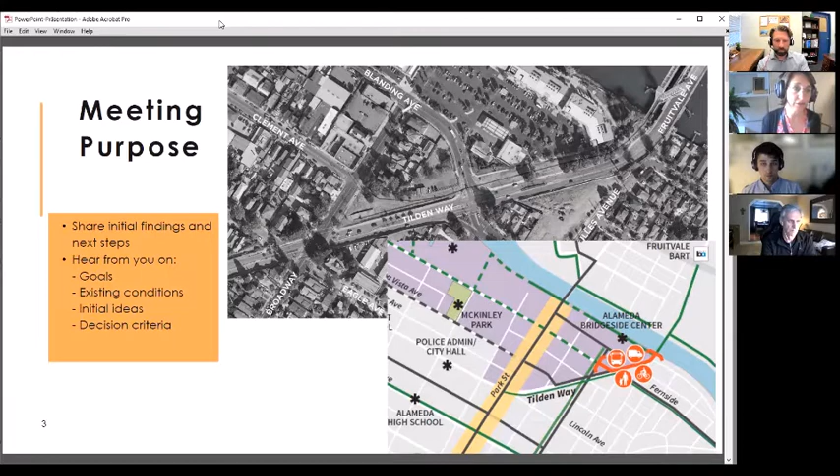What's been in our general plan all along is to connect Clement Avenue and Tilden Way somehow. It is a truck route, and also it's an opportunity for green space, open space, and improved community in this area, which is now really just bisected by this major street, and somehow to calm traffic. We've heard from you all a lot about speeding and the difficulties crossing as people walking across the street and bicycling.

And so that's where we're at. We're at the beginning, so you haven't missed much. We talked about the project team here. Project stakeholders - we've had one kickoff meeting with the project stakeholders, as well as a meeting right before this one, like a week before, to show them the same presentation. We're working closely with the key stakeholders in this area.

This map, the star is the main part of the project. It shows we're in the eastern end, right by Oakland, and the upper right is where BART is. So a lot of activity going between BART and Alameda, especially for people bicycling and taking the bus.

We've already started reaching out to community members, sent out letters to adjacent properties, done outreach with social media, emails, and sandwich boards that sometimes are upright, but sometimes have fallen - so my apologies on that one. We do have a project webpage and an online survey that's going on right now and still continuing. So please fill it out and ask any interested parties that you know of to fill it out.

Here in the lower right is the project area, showing its proximity. This map is from 1924, going back in time, showing how this is an older neighborhood.

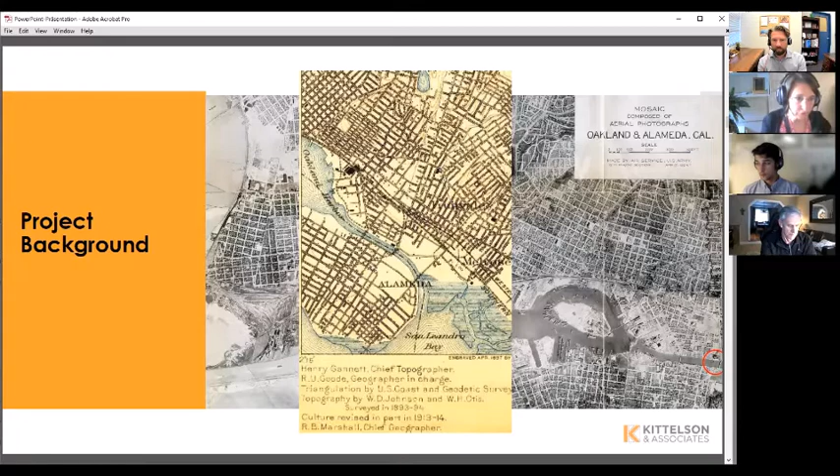Alameda was built, a lot of it, before automobiles. This map shows it used to be a railroad, as we talked about. So it has a long history and a solid community around it, and we're just trying to make it better.

We do have money. We have a $10 million grant from Measure BB, from the Alameda County Transportation Commission, and we used part of it to purchase the Union Pacific property. We do know we have environmental cleanup to do, so when it comes down to how much we have for construction, it doesn't look as exciting, but we do have money for it.

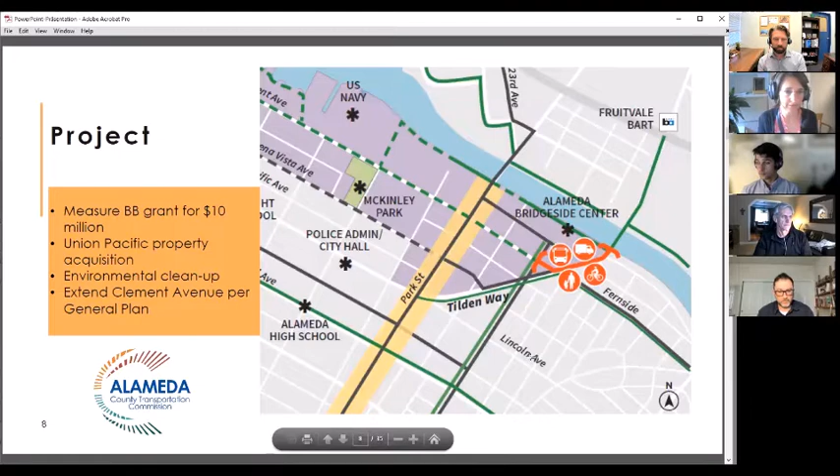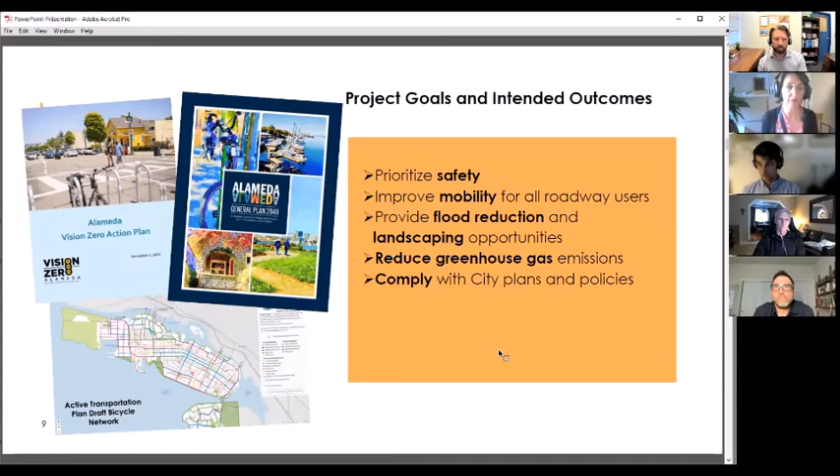So that's the idea: multimodal projects, safety, and mobility improvements. We've heard from you with the initial survey, looked at the preliminary data and open-ended comments, with people wanting open space and aesthetic improvements, landscaping as well. We have sea level rise in our future, so flood reduction opportunities are wanted, along with reducing greenhouse gas emissions and idling, and making it more attractive so people feel comfortable walking and bicycling, and of course complying with city plans and policies.

This shows what else is going on around this area. The big red is the project we're talking about, where we've purchased a property, and what more can we do with this area in terms of transportation and open space, green, rain gardens, bioretention areas. On the Oakland side, they're improving Fruitvale Avenue, especially for bicycling, and it's going to be nicer to walk there as well.

Then you get to the bridge, and the county is going to restripe to put bike lanes there. Then you have the Cross Alameda Trail, over 3 miles all the way to Alameda Point, and we're getting that completed. Clement Avenue is the project that will start construction this year and probably end next year, which will take us to this project at Broadway. Our project is this red section between Broadway and the bridge.

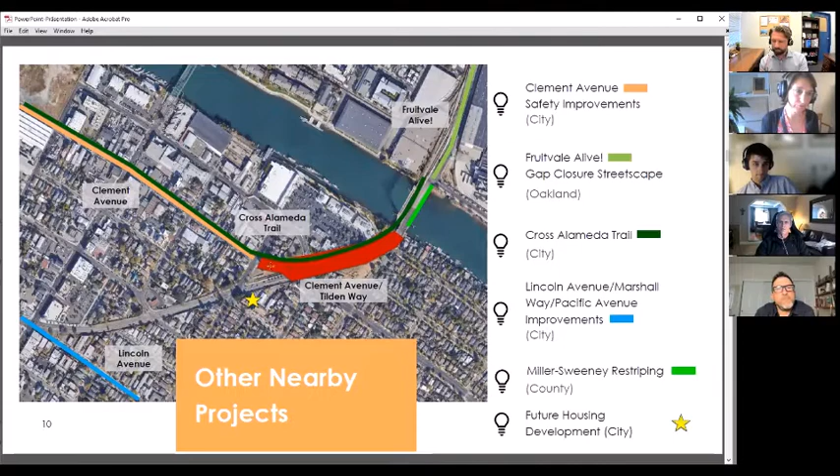We're at the first part of community engagement, and we'll have more in August and September, asking for approvals from the Transportation Commission and City Council in the fall, working on design in 2023, and starting construction in 2024.

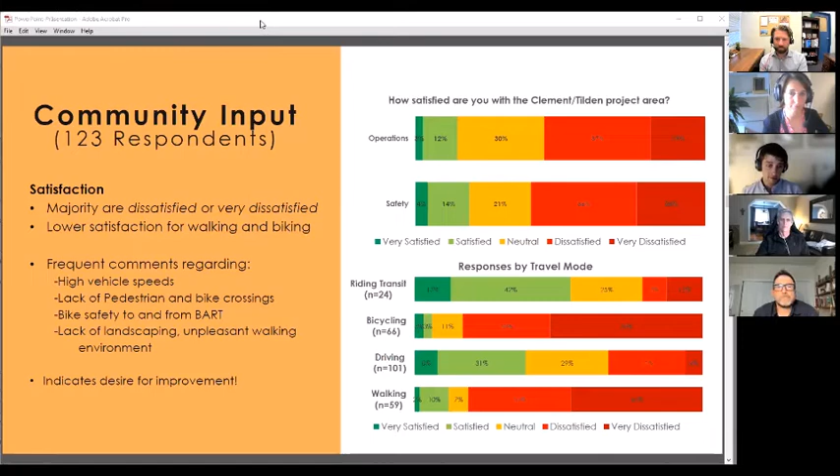Going back to those goals that Gail talked about, wanting to prioritize safety for everybody, whether they're inside a car or outside of it, and improving mobility for everybody as well. So we really see, based on the community input we have so far, a lot of opportunity and desire for improving conditions.

I want to go through a few basic pieces about what the transportation network is here. Tying it back to the project goals, as Gail mentioned, one piece is extending Clement. Looking at existing city plans, there are two basic things involved. One is you can see that dashed blue line right there where the extension would be, which is part of the truck route network, so it's a proposed truck route.

The other thing is it's a key extension for the Cross Alameda Trail. Right off the bat, we can see what that extension could serve, but there's also a lot of other needs in the area. There's the bridge connection for driving, biking, or walking to Oakland. There's the Nob Hill Shopping Center, which has bus stops right there. There are a number of transit lines running through the area, and of course connections to the south along Tilden and Broadway. So this map is showing a lot, and that's really because the area is doing a lot.

There are also some existing bike lanes, and then some other proposed bike lanes in the area, indicated by green. I mentioned some comments we got on the survey. We also worked with city staff to cull comments that were received in developing the active transportation plan. Very similar comments about speeds in the area, and very similar comments about wanting pedestrian improvements.

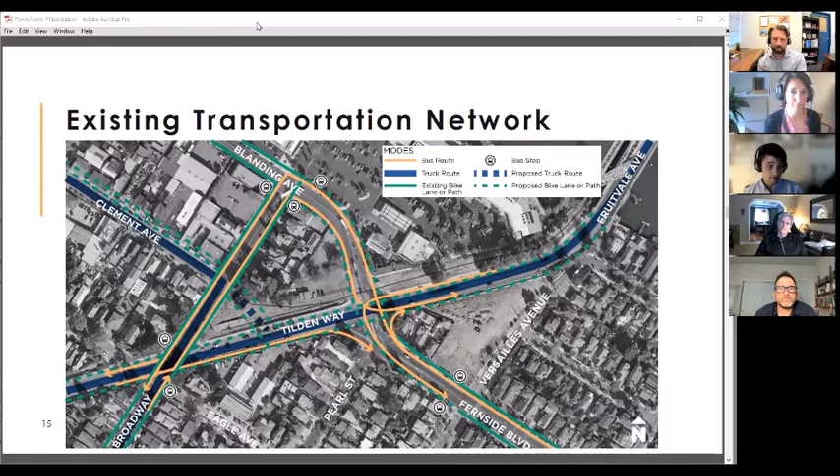So comments really indicate a desire for traffic calming or slower speeds at that Clement and Broadway intersection. Also, there's no pedestrian crossing on the southwest leg at Tilden and Blanding, so people have to go around and take the long way if they want to cross there.

And down at the bottom, where Pearl Street ties into Fernside, there's a vehicle movement that goes south to north where the driver has to judge a bunch of gaps to get onto Fruitvale to head to Oakland. We got a lot of comments from the ATP and the survey about that being a movement with a lot of conflicts, whether you're walking or driving there.

We did do data collection here, so we collected traffic movement counts for people driving, walking, and biking, along with speed counts. We got average and 85th percentile speed right near the bridge. The average speed is 28 miles per hour, and the 85th percentile speed was 34. That means out of every 100 people, 85 are driving that speed or lower, 15 are driving higher.

A lot of comments about pedestrians having to cross right turn slip lanes or having indirect paths. So I've shared a lot of information with you, but this slide contains a lot of the pieces that people have identified and we've observed from our field observations about conditions and opportunities for improvement.

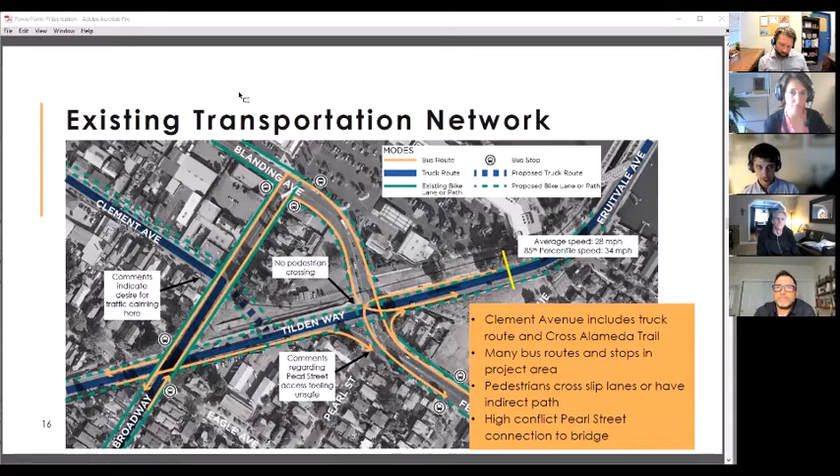The next slide shows the AC Transit bus service through the area. As I mentioned before, there is quite a bit of service, including a number of key routes that serve a lot of riders. There are routes that come from the bridge, take that right turn onto Blanding, serve the shopping center, and then head south, whether along Tilden or Broadway.

We've already engaged AC Transit and heard from them about what their ridership priorities are, and what their bus stop location and amenities priorities are, to make sure that anything we do here preserves or improves bus service, both from getting buses through the intersections and also making sure that the bus stops are pleasant and people can actually get to them.

In those conversations with AC Transit, we've heard that they really want to still serve that Nob Hill Shopping Center up there on Blanding and Broadway. That's a really key destination for them, but they obviously don't want any changes to degrade their service or slow buses down. There's really no desire to consolidate or remove any bus stops. The stops they have serve important purposes, but we did collaboratively identify that some of these bus stops could be made more pleasant, whether through shelters or improved waiting areas. So that's another opportunity for this project as well.

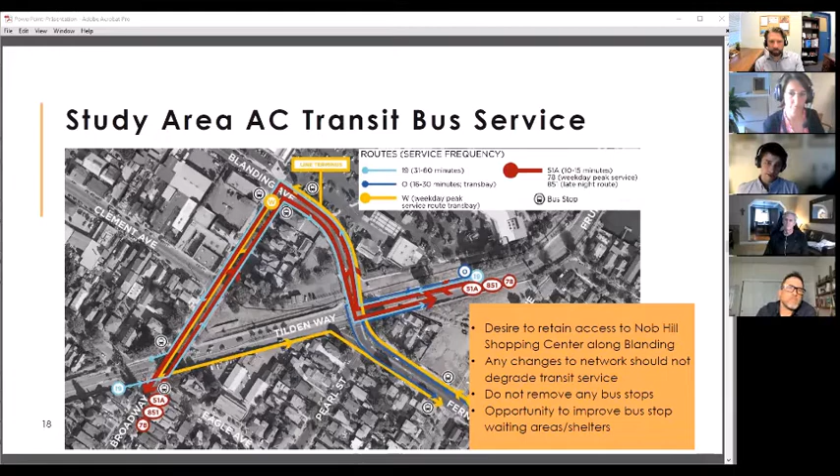Good, next slide. In looking at safety, I've already talked a little bit about what people have shared, what our field observations have shown, what speeds are, and where some key conflict areas are. So one more way we can look at safety is to understand what has happened in terms of reported crashes. This is showing reported injury collisions in the project study area from 2011 to 2020.

Recognizing that reported collisions aren't necessarily the full history of what's happened, but it's what has made its way into reports. Before we talk about any patterns at the intersection, I'll note the red lines along Clement and Blanding indicate those roadways are on the high injury corridor network from the city's Vision Zero action plan. And the Blanding Tilden intersection is a high crash intersection, so this is definitely a focus area coming out of the safety work the city has already done.

Right off the bat, the first thing you probably notice is there's a concentration of crashes at each intersection. Those little bike icons indicate crashes that have included someone biking. A particular note, we actually did add in a crash from 2021 - it's the pink crash right at Tilden and Broadway, near the bottom of the screen, which was unfortunately a fatal crash in February 2021. So that's the one crash on this slide that has resulted in death; the others are injury or serious injury collisions.

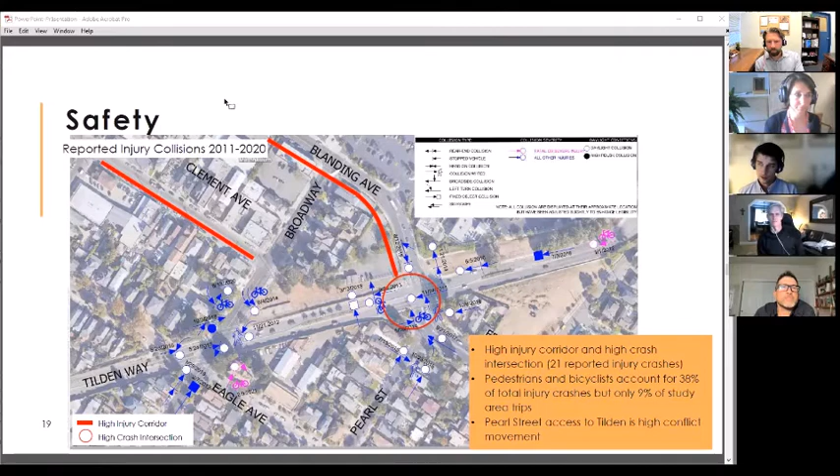The next piece of existing conditions I want to talk about is just a pure vehicle capacity standpoint - understanding if people are able to get through these intersections in a timely fashion. To assess that, we took traffic counts in March 2022 and compared those to what the city had from 2019 and other years that preceded COVID-19, because we know travel patterns have changed and will continue to change. We adjusted the 2022 volumes up slightly to be more representative of pre-COVID levels. Of course we don't know what the future holds, but we want to account for that. We typically look at the morning rush hour and the evening rush hour, the peak periods.

What these circles are showing is that at each one of these intersections, the existing conditions, adjusted a little bit for pre-COVID conditions, are below capacity. So there might be a little bit of queuing in those peak hours, but in general these intersections are operating below capacity. They're not failing in traffic engineering terms.

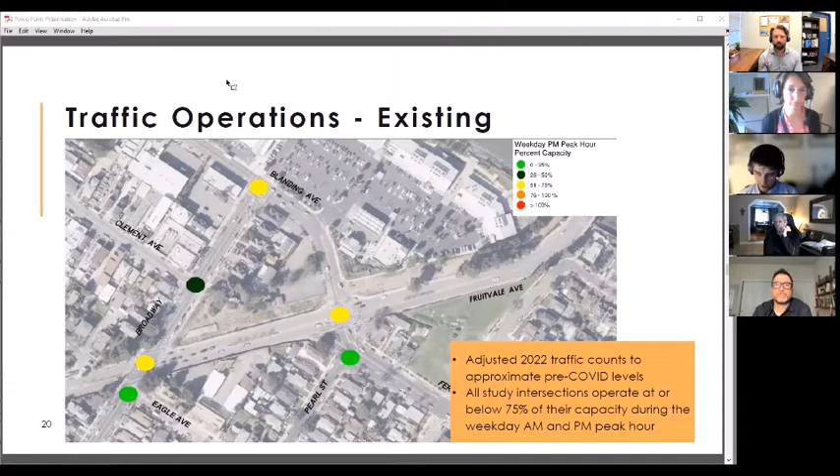We also want to not just plan for today, but plan for the future as well. So we've pulled projected traffic growth from the Alameda countywide model to understand projected patterns in 2040. We don't need to be beholden to a traffic model, but we do want to understand what we see coming based on projected land use and transportation changes. You can see some of those greens turn to yellow or orange, indicating from our legend that they get a little bit closer to capacity. But with existing intersection control and geometries, in 2040 things are still at or below capacity. So that's from a pure vehicle capacity and operation standpoint.

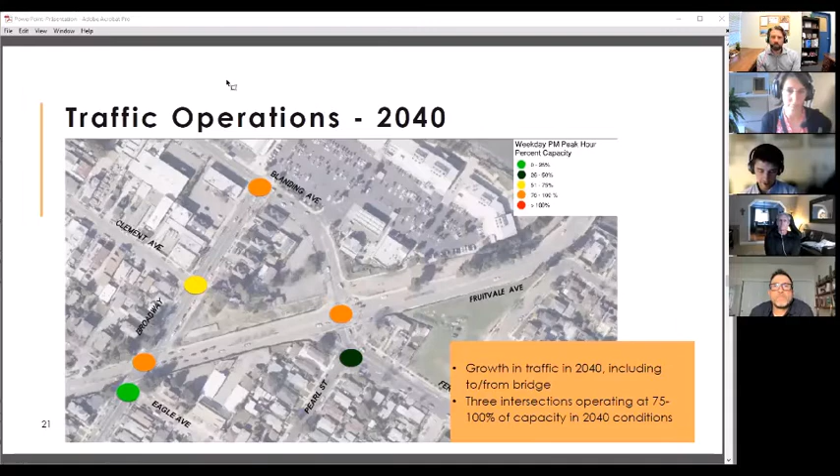Okay, so those are the existing conditions. And now we get to the fun part of talking about concept development. We've engaged some key project stakeholders, as Gail mentioned, and started to use our existing conditions to inform what our goals for this project would be, and drafted up some initial ideas, which are good for understanding constraints and getting feedback. Again, key emphasis here: decisions have not been made. These are initial ideas and concepts.

The next slide will show how a few concepts that we've come up with align to the project goals.

So again, wanting to improve safety. We talked about speed. We talked about providing more connections for people walking and biking. We talked about trying to reduce some of those key conflict areas. Wanting to provide mobility and connections for all modes. Wanting to provide that truck access for the general plan.

As important as anything is making sure we're not overbuilding. We want to consider future projected travel demand, but we don't want to overbuild or put more pavement down. That runs in direct contradiction with the city's goals to reduce greenhouse gas emissions and provide flood reduction and landscaping opportunities.

So we've looked at a couple options at Fernside and Tilden—a roundabout and a signal. I want to say a little bit about a roundabout and how that would help with project goals. The next couple slides will show us a few things about roundabouts.

Roundabouts might be a little bit unfamiliar to some of you. Some of you might have seen these slides at other city presentations, but they're still an emerging intersection form in some areas. Over the past few decades in the United States, they have a remarkable track record for safety performance. Before and after studies, time and again, have shown not just a reduction in crashes, but a sharp reduction in injury and fatality crashes.

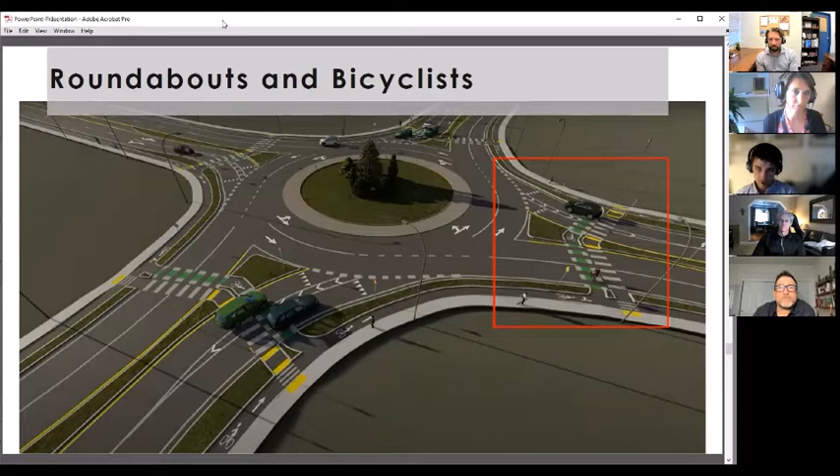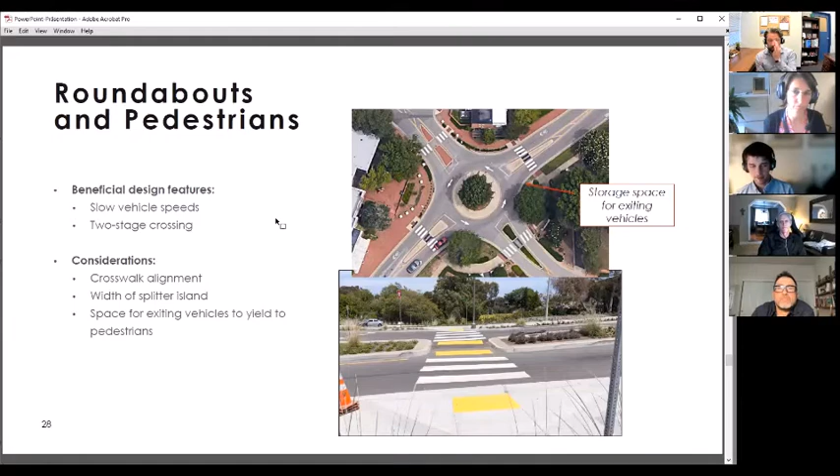The first piece you'll notice is that at the Fruitvale-Tilden Blanding-Fernside intersection, there's a single lane roundabout. That would be for folks coming off the bridge. The lanes would drop to a single lane, and then there would be a single lane roundabout to get through, whether you take a right to Knott Hill, continue along Tilden, or a left to Fernside. Moving from right to left, the light green indicates a multi-use path or bike and walking space, so there would be opportunities for bicyclists to be separated and stay out of the intersection.

Moving a little further, where Fernside and Pearl are, you see the annotation that says right in, right out. That's essentially eliminating that Pearl Street conflict we were talking about, where people dart across Fernside to get to the bridge. So that's putting a median there, so that conflict goes away, and those drivers would find a different way to get to the bridge.

How do folks come off the bridge and get to the potential future Cross Alameda Trail? They'd take a separated bike lane, and you can see where that bike path could be two-way. Then they could take that right and connect onto Clement. I'm showing that as possibly being two-way as well.

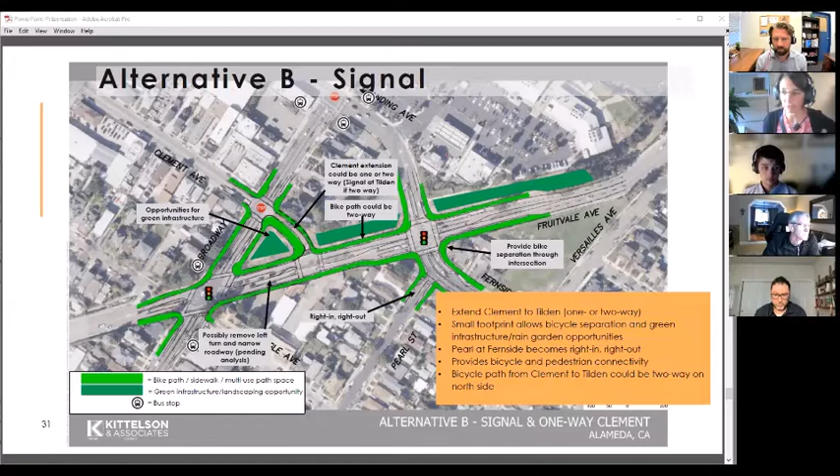And then at 2 minutes, the audio will be muted. Usually we show the timer on the screen, but I don't know how to show both the timer and this concept draft idea. I think it might be valuable to show, instead of the timer, something like an alternative A1, or whatever the speaker wants us to show.

Is that okay, city staff team? Consultant team, you think that works okay? Okay, I get the thumbs up and a nod. Super. So we have 6 hands up, so please don't be shy. And 7, keep it up. All right, 8. All right.

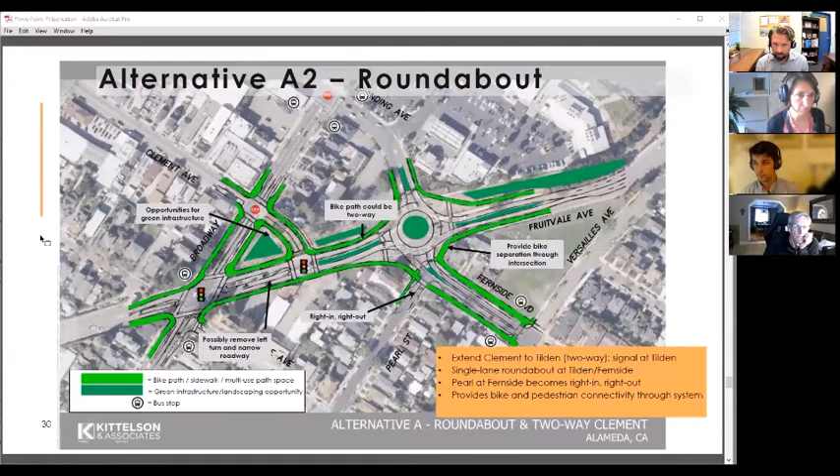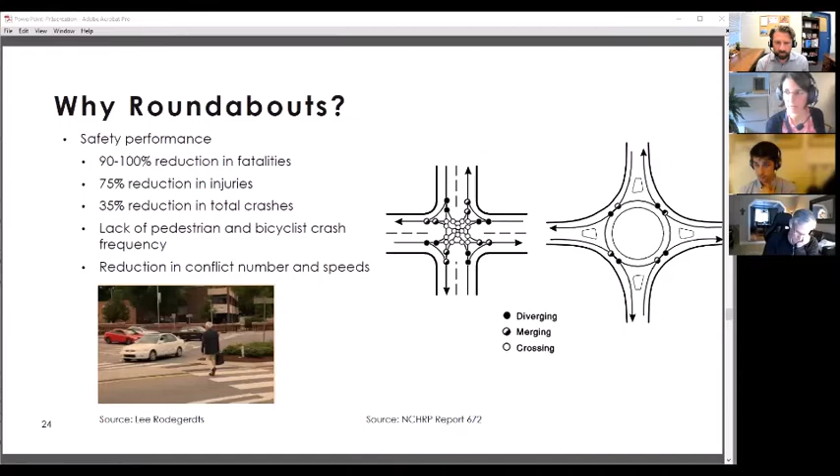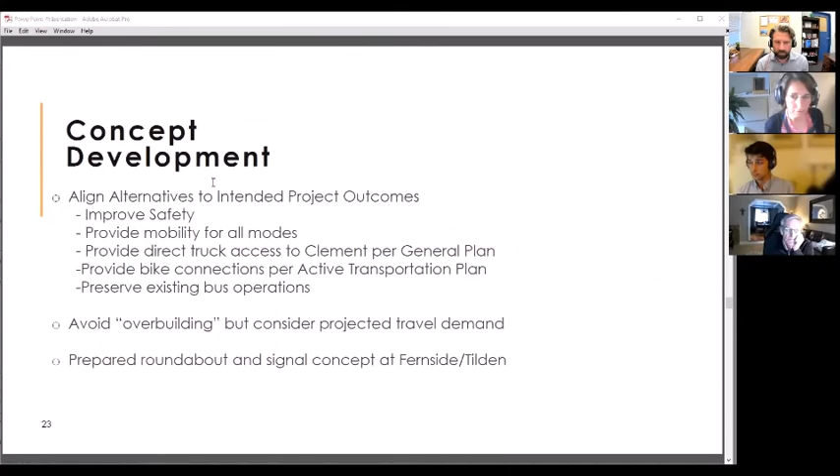I'd like to see the two roundabout alternatives that you were giving. A little bit further than that. There were two initial roundabout concepts that you were showing near the beginning, where you showed two potential roundabout configurations when describing them. It's like two examples where you were just sort of going over what a roundabout is. One of them had full separation and one of them didn't.

Yeah, I guess it's that one. Yes, so if you look at this top picture here, the thing I'd be concerned with if we went with a design like this first one is there's zero indication for a cyclist riding here. What happens? It's like the bike lane just ends and they essentially ride into a curb if they keep going straight. So if we move forward with something like that, I would hope we'd put in something that gives the cyclist some indication of what they should do - either dashed green, or showing it's a merge area or something - because where bike lanes just end is where it becomes most dangerous, and it's really unfortunate and very discouraging to cycling.

So I'd hope we'd go with a roundabout design with full separation like you showed in the other one. I guess my main concern with the full separation one, though, is that it does significantly increase the crossing distance for pedestrians. If you just want to go straight across an intersection with a roundabout in it, even with those pedestrian refuge areas, it makes the whole walk a lot longer. So it's something to consider, if we can figure out how to minimize that or make it more pleasant.

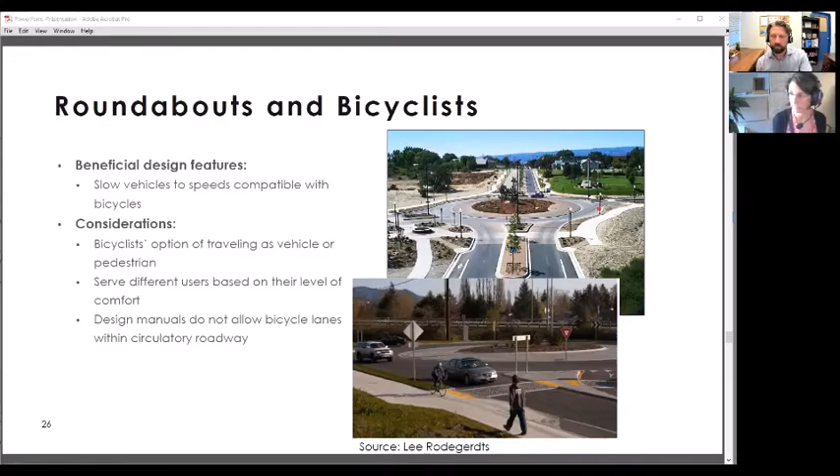So one of the biggest priorities I think to see here, and that I'd like to see on this alternative A1, is, you know, I think it's very promising. But the biggest priority in my mind is how do we get a protected bikeway all the way to Fruitvale BART that everyone will feel safe on and that keeps bikes away from traffic as much as possible. The west end has plans for the bicycle bridge, but the east end needs something too. I think maybe this could be that area.

So with that in mind, I guess one thing is how does this connect to a protected bike facility on the bridge, and what does that look like? Obviously that seems to be out of scope for this project, but I would like us to at least be a little forward thinking here, making sure that there's a safe connection and we're not ruling ourselves out from doing a safe connection over that bridge.

The other thing I'd point out is that Broadway and Tilden intersection on the left there has a signal. If we've got people coming home from BART and they need to make a left turn at that intersection, do we want them going out into the left turn lane? Maybe not. I think these kinds of Dutch style roundabouts, my experience, I think it is a good idea. Look at what they do in the Netherlands and do it here, because they're very successful there, it seems like. So, copy that, even if we don't have space for a full roundabout, if we can have clearly marked ways for bikes to turn left, kind of like what was done on Otis Drive, for example, that might be a good avenue for exploration.

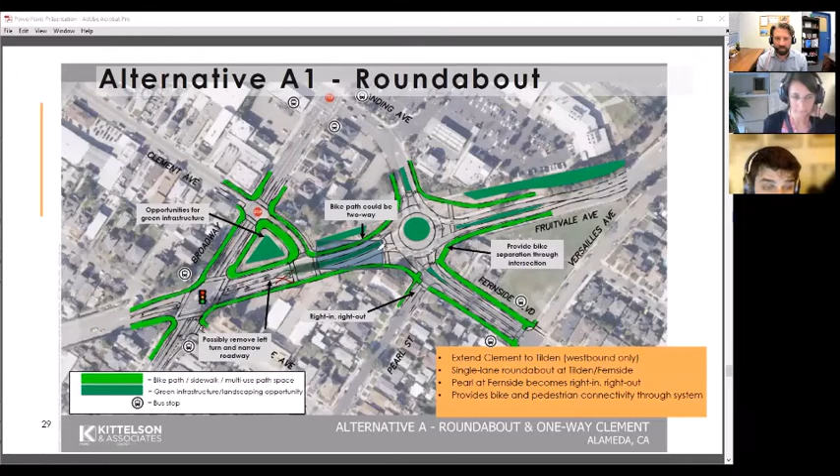And that would mean we wouldn't necessarily have any crosswalks there too, because they would potentially have safer pedestrian crossings at the new crossing at the roundabout. It could go either way with the median there.

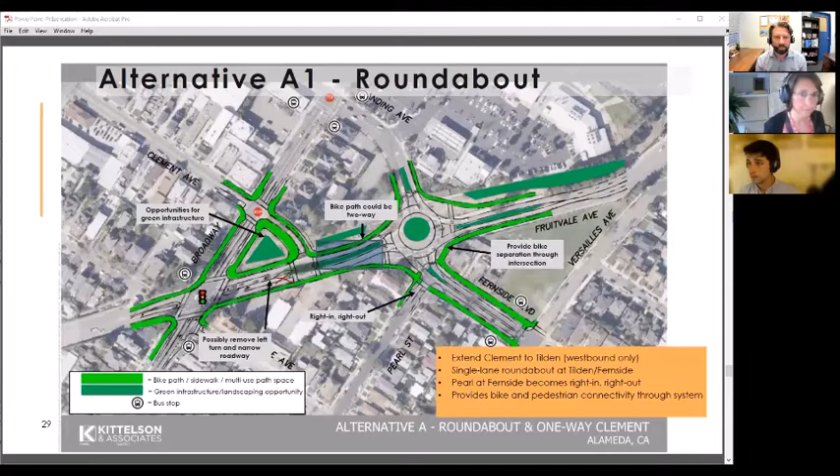And before I interrupted, Mike, is there something more, anything else to summarize? Okay, well, super. I don't know if we'll have - we had talked about just ending the meeting at this point and letting you all know that, let's see, yikes, can't get out of here.

Gail, there actually is one other thing I wanted to say, to the comment about drivers not knowing how to use roundabouts. This is something we've talked about in other contexts, both with Alameda and other cities, where an education program is a really good way to introduce roundabouts, especially if they're the first or one of the first in the city. There have been comments throughout the night about that - I think it was Linda's comment about drivers not being familiar with it, and it's true in many cases. It's new, and someone shared the anecdote about not knowing to yield.

A good design is really self-enforcing, and drivers and other users know what to do. But throughout the United States, cities have really good educational resources, whether it's online, an educational program, or through other avenues too. So an education program is definitely something we would look to promote with constructing a roundabout - that's something other cities have dealt with too.